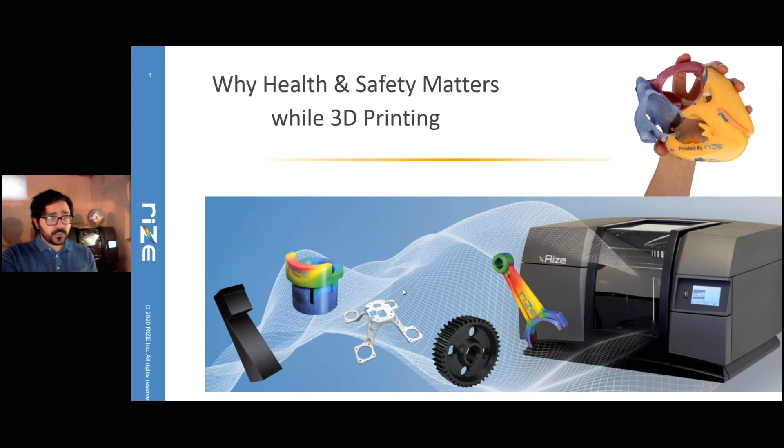But it also relates to overall safety from the entire process of 3D printing, right? It's not just the process of the actual extrusion of the plastic or the color deposition. It's an entire thing about how you're able to be safe and healthy when you're 3D printing. Have we really even thought about all these different areas?

So there are 4 main areas we're going to focus on today. The first one is the printing process we talked about already, the extrusion of plastic. What kind of emissions are there, not only from a particulate standpoint, but from the actual release that's happening. We'll discuss more on that and the differentiator of Rize.

Post-processing is another process of having your 3D printed part and using 3D printed technology. We'll show the differences between Rize and FDM and the different ways we're able to make sure you're safe, not only as an operator, but as a company and just as people 3D printing.

And then there's obviously the actual usage of the part, right? That's ultimately why anyone's buying a 3D printer, is to use the parts being printed. But how safe can you be with those parts once they're actually printed, and what other things can you do? We have stories of the current world right now, especially with the COVID situation, which we'll talk about. And then, of course, at the end is what happens once you've used your part. What does your part's end of life look like? Is it one use and you drop it? Are there other ways that you can extend the life of your part? We'll discuss that here.

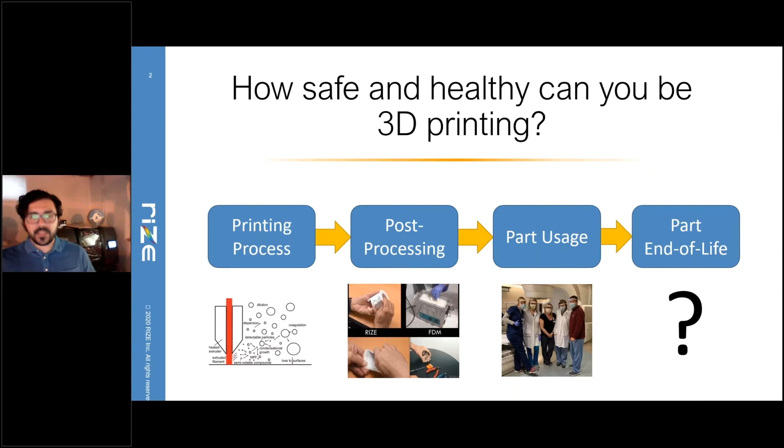So first, we have to talk about the printing process. This is, I think, where most people think about with safety for 3D printing. There's a lot of questions that pop up, like can I safely be next to my 3D printer while it's working? I feel comfortable with the Rize here and the 2XC running at the same time.

We will pepper in all the reasons why Rize is pioneering this and why I am comfortable with this throughout the whole presentation. We also have a part where we'll remove the supports at the end of this, so if you want to stay on for the Q&A, I'll show you how the supports work.

But more questions that you ask are, are there additional PPE needed? It's one of the hidden costs of 3D printing when people first buy a printer - how safe are we actually being? Are there extra things needed to make it work? If you're using a powder-based system, obviously there's a large amount of environmental controls and PPE needed, especially in that category. Do HEPA filters work? In the early days, people were putting HEPA filters on printers hoping to completely make the printing process safe, but we'll talk more about that in the research and how Rize differentiates itself.

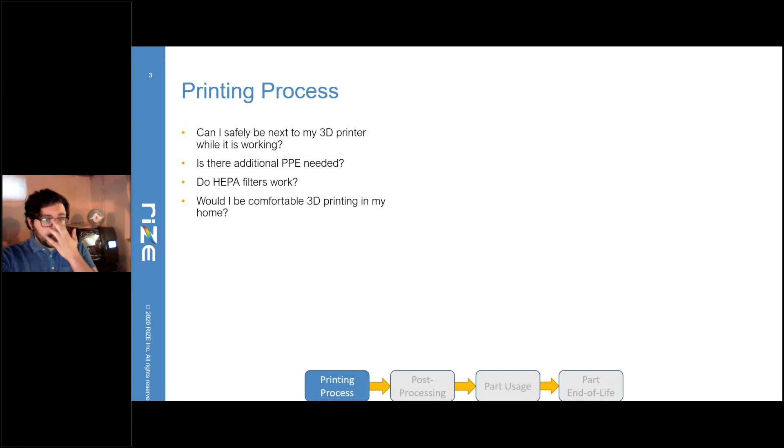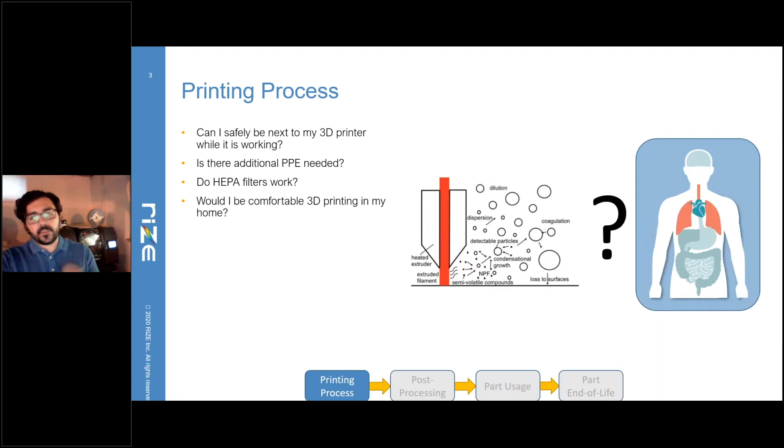Would I be comfortable 3D printing in my home? As you guys know, we're in my basement, so welcome. But otherwise, would I be safe doing this? Would you be safe as an employee having a 3D printer in your home, the way the world has changed and how businesses have to adapt? We're going to talk about some of these things right now, specifically the person operating this and the people involved in the process. Are you being safe? What are the things you could be exposed to that you may not know?

This brings us back to the original UL and Georgia Tech research from 2018. It was in 2015 the nonprofit safety science company Underwriters Laboratories and the Chemical Research Initiative, the Georgia Institute of Technology, and Emory University Rollins School of Public Health worked together to conduct a 2-year study on desktop 3D printer emissions. Before that, there was really nothing - a lot of speculation of how safe people actually were. Over the course of the study, Dr. Marilyn Black, Vice President and Senior Technical Advisor at UL, and the rest of the team found that 3D printer emissions can actually pose a potential health threat.

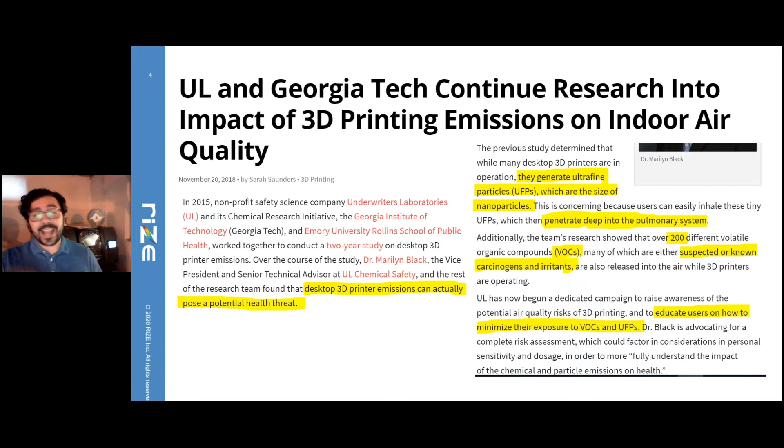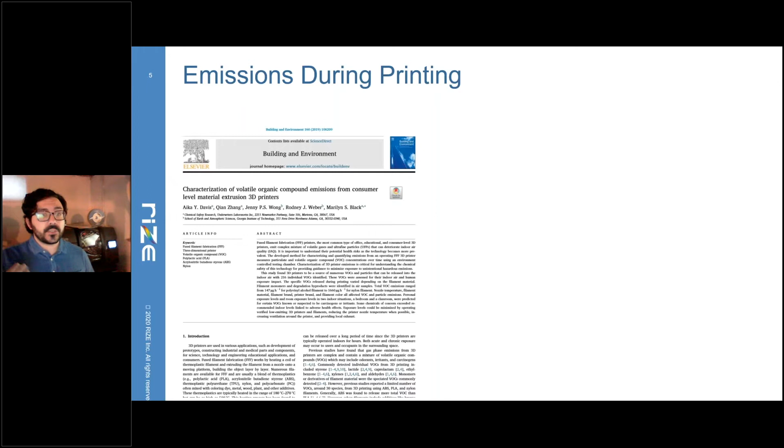The paper, 'Characterization of Volatile Organic Compound Emissions from Consumer Level Material Extrusion 3D Printers,' goes into extreme depth, but we'll simplify it for you. Some key takeaways: more than 90% of the particles emitted by 3D printers are in the nanoparticle range, less than 0.1 microns, and when inhaled can cause cardiovascular and pulmonary issues.

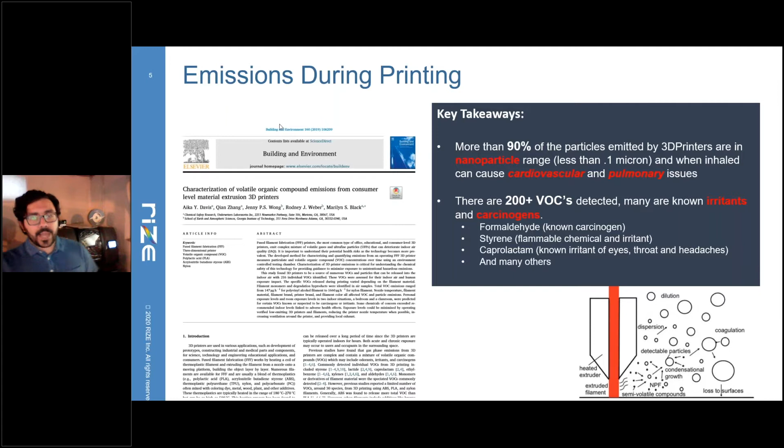There were 200 plus VOCs detected, many known irritants and carcinogens - formaldehyde, styrene, caprolactam, and others. They were in some of the most commonly used 3D printer materials, which for a lot of desktop 3D printing users came as a surprise. ABS - everyone could smell that, so that one doesn't come as a surprise.

Styrene and formaldehyde - PLA, which was touted as an education standard and used in schools and homes, smells kind of like sweet corn, but it had formaldehyde, caprolactam, and styrene. So not as safe as we all really thought. It's great that this study was out there, and it's kind of the crux of where Rize started and what its mission was about - to pioneer safe 3D printing.

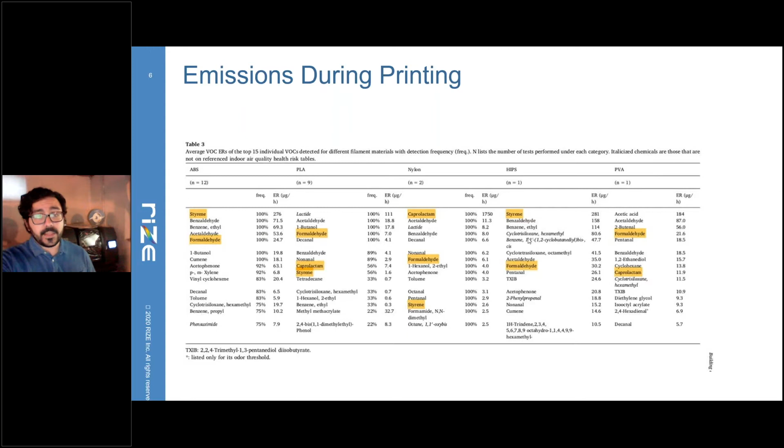Nylon, HIPS, PVA - all of these have various emissions that are just not safe, and this is during the printing process. Some of the things that can happen from a short-term perspective: headaches, nose, throat, and eye inflammation, coughing, painful breathing, pneumonia, bronchitis, and skin irritation.

This image on the left here is from airthings.com. But the long-term effects include nervous system issues, headache and anxiety, cardiovascular diseases, respiratory diseases, impacts on your liver, and impacts on our reproductive system. So the big thing was that nobody really knew this was happening.

There are obviously some serious effects if you don't take it seriously. Again, HEPA filters were originally used, especially from a particulate perspective, but they had no effect on the VOCs. So when you're going out to buy a 3D printer, you really have to make sure that printer has been certified. If it hasn't, you have to go through that whole process to make sure it's actually safe for the people using it. And if you're a company, or even in today's world trying to enable engineers, you want to make sure that it's safe.

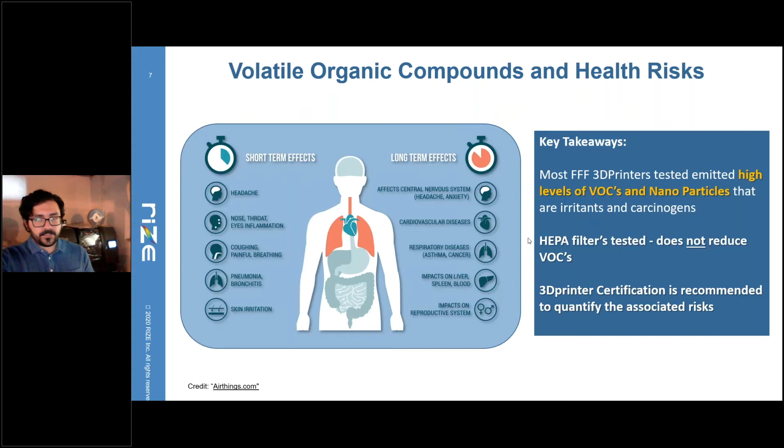And so to touch a little bit on Rize, the whole reason we're able to pioneer in this safe space for 3D printing is because our whole platform is designed around this material science platform. So you can see on the left, the actual 3D printing platform is based around augmented polymer deposition, APD. Here we have the Rize 1, and you can see over here we're building a raft to help build a nice level surface for the parts to be printed on. We're adding our release ink to that raft and then building the part on top of that.

One of the magic things that Rize is able to do is actually infuse the materials that we use, the Rizium cycloolefin based composite, and we're able to inject the ink almost like adding dye to a t-shirt. We're able to infuse the part with the color at a voxel level, at the smallest levels that you can, and then we're sealing it off with that same material so that it's able to not only have vibrant full color, but that color is secure and sealed, and you're able to reap the benefits of the material science and all the abilities that that plastic has.

And this platform not only goes from the materials itself, but it goes to the functional inks as well. And I can actually show you some of these here. So we have Release One. So this is the release ink here. We have yellow, cyan, magenta, and black. And these easily get stored into the printer, and these inks themselves are safe to deal with. And we'll touch more on the specifics of what we've done to certify that all of this is safe to use, and that I can have it in my basement here.

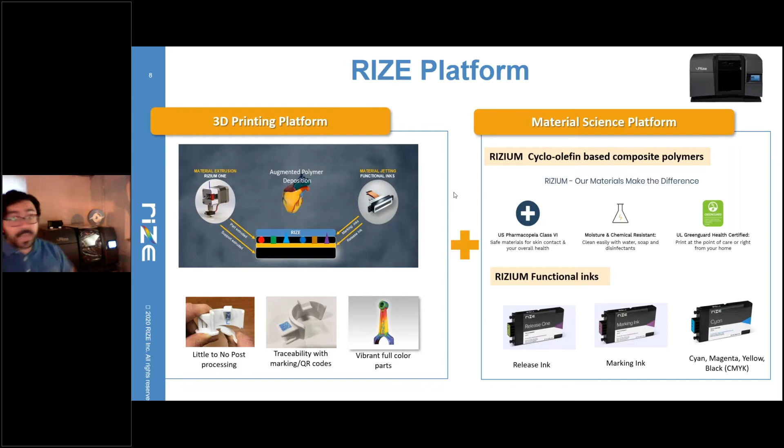So one of the stories behind what this whole thing has allowed us to do is to adapt to the most extreme situation, which is what has happened with the world today with COVID-19. So back in March of this year, March 16th, we went from working in an office to having to switch to working at home. And so we were able to basically comfortably put our machines into our engineers' homes. You can see here, one of our engineers with their kids and Rize 1 in their home. And amazingly, we all thought it wouldn't have lasted as long, but it is still today, and may potentially change the way that we do work.

As you can see, to today we're still doing it, and you can see myself here with the X-Rize and the 2XC there in the middle. And it's really changed the way that we've looked at businesses and being able to enable engineers. And I just feel lucky and honored to have these in my home, to be able to keep staying productive and just enabling me to keep developing at home and keeping the company alive and running. And we're able to help our customers out and keep moving on. And it's really changed the way that we've done everything, right?

As you can see here, our CTO, Eugene, completely changed his home office. This is his gym. So he's got both printers set up in his home right next to where he's working out. And from a health and safety perspective, we're able to have that confidence because of the fact that we start primarily as a material science company. It's a beautiful view, right? Everything in the printing process that we're using is safe. We're able to put it right next to where you're living, which is an incredible thing and not something that everyone can do safely.

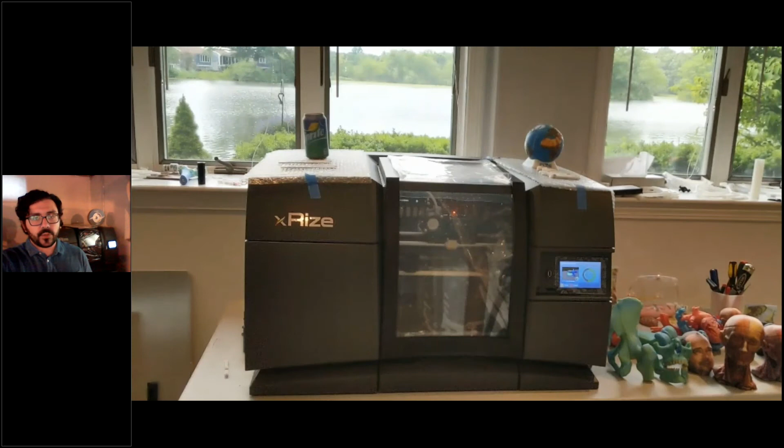The next stage of the 4-part process, the life of a 3D printed part, is post-processing. Before I get into this, we'll go back to my experience with ABS, which I no longer print with at home. Most of that was obviously due to the smell, but not only the emissions after finding out that study. But once you print that part, one of the things that ABS was good for was being able to use chemicals to bond and seal. This is 2 parts here. You can see it was bonded and sealed together. But using those chemicals is not safe, and the printing of those parts is not safe. And it just adds extra process to something that could be a lot simpler. And so when you are trying to get that part from the printing process to being used in real life, the clock starts, and it's a whole bunch of time and effort.

And that's really the value that you're playing here, and how much safety is going to be involved in removing supports, whether they're similar materials, just like typical FDM printing, or you're using soluble supports. Both of those have different levels of not only time and effort, but safety and the potential health of that employee behind that. And then, of course, there's surface finishing, right?

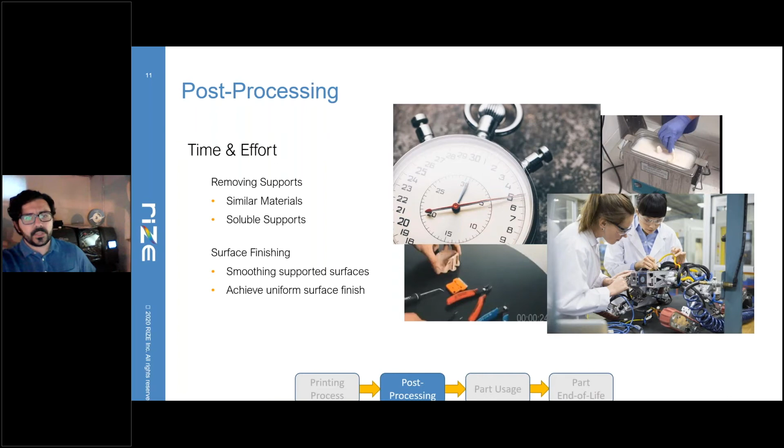So there's smoothing supported surfaces, because not all surfaces in 3D printing necessarily have the same surface finish. You may want to go in and smooth it afterwards. And what you're trying to do is achieve a uniform surface finish, because when most people think plastic parts, they're thinking injection molded parts. That is where their perspective is coming from. So everyone's always trying to smooth surfaces, but how much is going into that?

And so if we look at this, we're talking about post-processing, right? So in this specific example, we're talking about soluble supports. A great idea, but the real question is, is it safe for the operator? And one of the things that helps Rize achieve safe post-processing, and essentially minimal to zero post-processing, is the non-toxic release ink that allows us to remove supports easily and reduce the entire time.

So you can see in this video here, on the left, you have Rize. This part was printed on Rize 1 using the same Release 1 ink that's available on the XRize and the Rize 1. You can see just how easy it was for the supports to be removed. The surface finish is almost identical to the rest of the surfaces.

With the FDM part, you're having to take multiple trips to this bath to reduce the support material. And after 3 hours of going back and forth, putting gloves on, putting a respirator on, and making sure that you're safe, in 25 seconds you're able to take the supports off of the part made on Rize. So a big reduction in the amount of safety measures that you have to take. You wouldn't have to go into the office or set up a different area in your home if you have a 3D printer at home to make this happen.

And then post-processing, removing supports, it's work, it's strain. As you'll see in the example on the right in this video here, I'm a hobbyist printer at heart, so most of my material is the same material for the supports, and it is a lot of time. It's a big effort. It's really strain, and really, at the end of the day, do you want to be spending all that extra time?

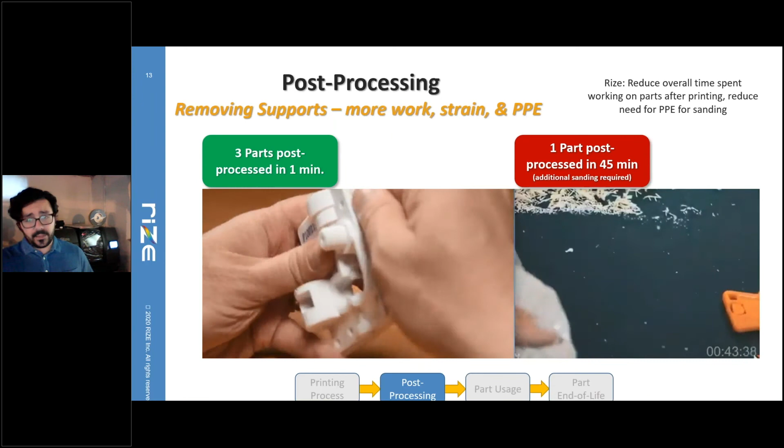So let's say you get the material off and you're able to get that surface. That one surface is not as smooth as you would like. So you're going to have to do an additional sanding step, which means you're going to have to put a respirator on. You're going to have to make sure that you're not doing this in the home, to avoid bringing that to your family or yourself.

So it really begs the question of, is that worth it if we can just take an approach like we do with Rize? We're able to have that release, get uniform surfaces, complex surfaces, and minimize not only the amount of work and strain an employee has to do to get that part to be successful, but we're all happier. We're not using PPE. We're not putting people's safety at risk.

And of course, this third step is where everyone wants to get to. Everything else up to here is to get to this point where we're actually able to use these parts. We're able to 3D print them and use them. We obviously have a story to discuss from a PPE perspective. Anyone that's in the 3D printing world has probably 3D printed a mask or a face shield at some point, maybe a door holder, as you can see there in the middle. But really, there's so much that goes into part usage and safety and things you have to consider once you get there.

So first of all, is the part ready to use after it's printed? So we just discussed the post-processing. Is there anything else you have to do? Are there other chemicals you have to be using? Is there some kind of a rinse bath you need to use? How many uses am I getting out of that part?

So great, I've made a part, but how often do I have to do this? How many more times do I have to expose myself to those post-processing procedures to make another part to be used? Will my part survive falling off the table? I think this is kind of the crux of early color 3D printing, and still today. I have a full color part, but if it falls off the table, is it destroyed?

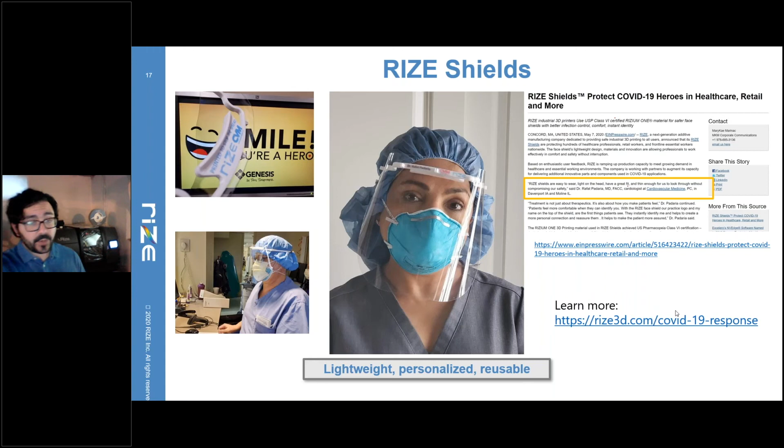Now, part usage. We're going through this again. Again, we're talking about the material science platform. Rizium 1 is based around the USP Class 6 certification. We will touch on that more, but essentially the entire series of Rizium materials, Rizium 1, Rizium Carbon, Rizium GF, all of them are going to benefit from the same material science that Rizium 1 has, with the exception of the composites, which are going to have some added strength to go along with it. So you're going to get moisture resistance.

The Rizium-based material has low moisture absorption, less than 0.01%. So you don't need to store this material at any specific temperature or environment. And even if you're in an environment with a lot of humidity, you're not going to have to worry about your parts and your materials being stored.

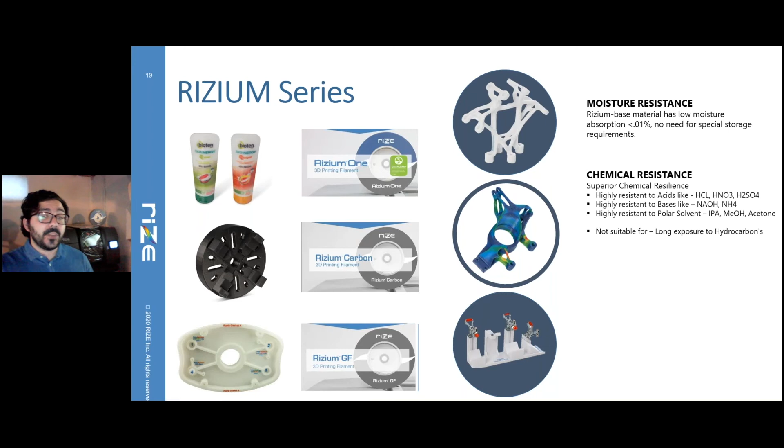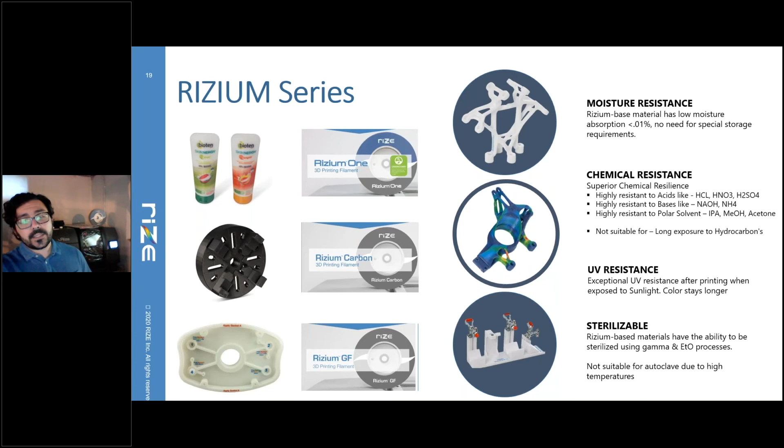You also have chemical resistance. So let's say you're working in a lab or in some type of environment where you're going to be dealing with acids, bases, polar solvents like acetone. You're going to be able to use your parts safely without worrying about them breaking down. The only thing with this material series is hydrocarbons and long exposure there. Want to avoid that. But you'll also gain UV resistance and, of course, like we mentioned, some sterilization abilities.

So let's talk about the USP Class 6, because many of you may not know what that is, and anyone that's in the medical field will know. Essentially, we're talking about non-toxic, biocompatible, medical-grade materials. So pharmaceuticals, medical devices, food and beverage companies, basically anything that's going to be dealing with the human body. Is that material safe? And there's testing that's gone into that. So we've done the work to classify Rizium 1 and Rize 1 and the inks that we use to go through this testing.

There's acute systemic toxicity that measures the human hazard by oral, dermal, skin inhalation, intracutaneous reactivity, so the material directly applied to the tissues with no skin protection, like the face masks, right? And then there's muscle implantation, where it actually goes into the body. So this is very rigorous testing, but Rize 1 was able to get certified, both the inks and the material as well. And the different applications for Rizium 1: medical and food industry, and of course pharmaceutical companies, medical device manufacturers, and many more.

And the other thing for part usage, and it ties into the printing process itself, is the UL GREENGUARD 2904 certification. That 2018 research that we discussed at the beginning is what led to the UL GREENGUARD certification. Rize is the first company in the world to receive the 2904 GREENGUARD certification for the Rize 1 3D printing system. And it not only met, but exceeded those requirements because we have such a strong focus on the material science itself. Because we had this strong focus in the beginning, we're able to benefit by being so far ahead of everybody else.

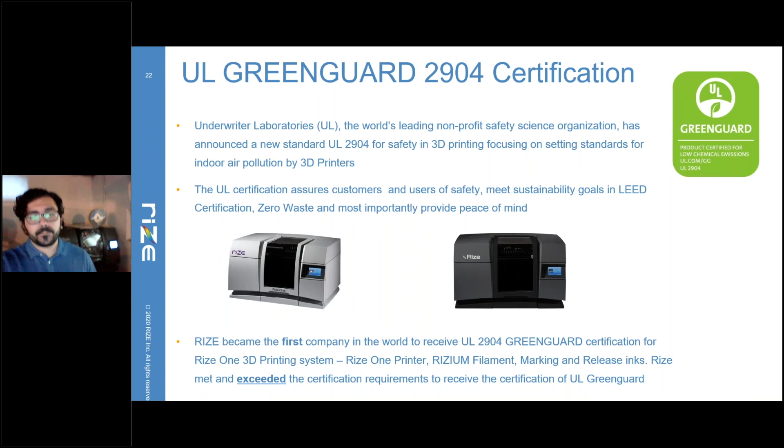And then our last topic here, before we get into the Q&A, is the end of life of a part. So, okay, you've printed the part, you've used it maybe once, but what happens after a few uses? Am I able to use that part again? I've seen with some of the color printing from fellow employees who used to work at some of the companies that are big in this now, those old materials, after maybe a year or so, and even 6 months sometimes, those resins will start to sweat and degas because of age. They're going to absorb moisture and they're going to degrade. And then even just reuse, let's say you need to extend the life of your part, especially in today's world with COVID.

Are you going to be able to sterilize it? And then if you need to be disposing it, can you at all? If there are unsafe inks, even though that resin possibly could be recycled, with that ink, it won't be able to. But any of our color parts or just simple Rizium-based materials are able to be recycled in the number 7 bin, and you're able to do that with ease, not having to worry about where it's going to end up.

And of course, the ability that Rizium gives you is to extend the part end of life with chemical resistance, UV resistance to keep that color nice and strong and vibrant, moisture resistance, and sterilization. And that does it for me.